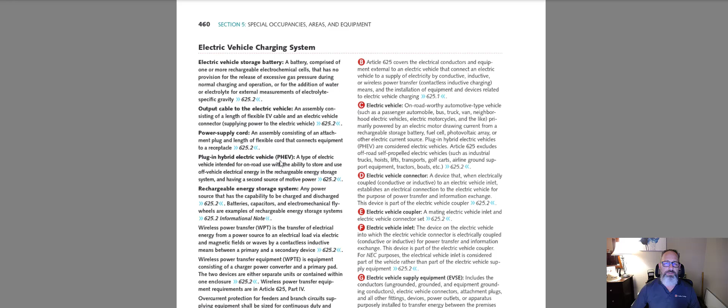The rechargeable energy storage system is any power source that has the capability of being charged or discharged. This could be batteries, capacitors, or electromagnetic flywheels, for example. And the EV charging comes from Article 625 in the National Electrical Code.

Now, when we look at some of the specifications, unless specifically listed or marked for the location, the electric vehicle supply equipment coupling means shall be stored or located at a height not less than 18 inches for indoor locations and 24 inches or above for outdoor locations. So the connections cannot be laying on the ground.

And most electric cars now have the capability of knowing when 240 volts is applied, then this is a level 2 or 3. If it's 120, then it's a level 1, and it changes the rate of the car charging. And not only is the rate changed, but the amperage draw is much lower as well.

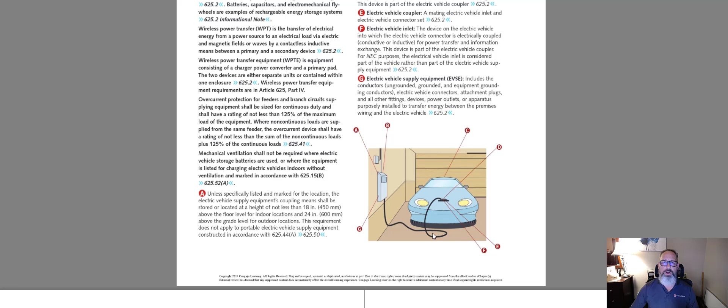So you have to understand when you're connecting and setting up a charger for an electric vehicle, what's the charger type, level 1, level 2, level 3, and then from the manufacturer, what's the amperage draw? They're all different. Tesla is different than BMW. BMW is different than Ford or Chevy. So the manufacturer will provide the amp rating of the outlet or receptacle or the connection point to the charger. So those are things you need to consider.

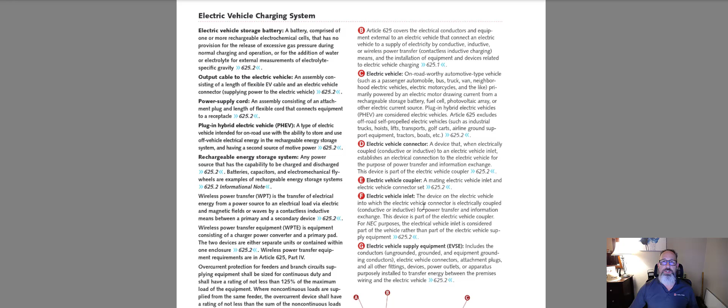There's kind of some average values that can be used, but specifically when connecting an EV charger, you want to make sure that you connect it properly. Now, I wanted to also point out this one right here. So wireless power transfer, WPT. If you guys have a phone and you can lay it onto a charger and it charges wirelessly, that same technology is being introduced and used in mass transit.

For example, they would use electric buses, and at each stop, the bus would come in and pick up a charge so that it will charge very rapidly for a short period of time, and then it moves on to the next stop, and it can be charged without plugging it in. So there's a lot of advantages of that. It could be used down in the harbors where they use more electric vehicles now than gasoline or diesel vehicles. So the wireless charger is new, but it is being stated here in the National Electrical Code.

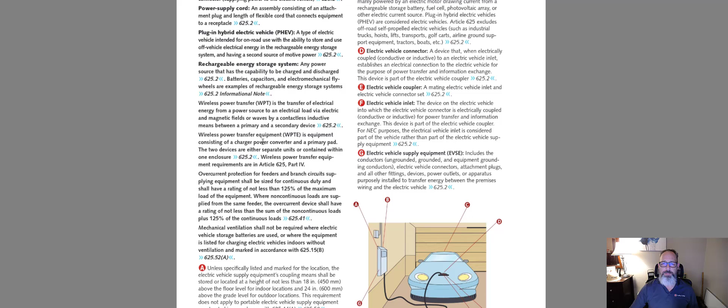So you have the wireless power transfer using magnetic fields or electric fields, and then you have the transfer equipment that's dealt with in 625.2. So the utilities need to be engaged in this, just as an FYI, because this draws a lot of current for a short period of time, and that has to be accounted for in the electric grid.

Fire pumps are the next topic I wanted to cover, because you will run across fire pumps, and you need to understand why they're used and how we need to make sure they're connected. So fire pumps are used to boost the water pressure for fire suppression systems that are installed in buildings. And they may be required because of the large area that needs to be extinguished. In other words, the piping has to be flooded in some cases where it's a dry system.

Dry systems are pipes that have no water in them, and then when a fire alarm is set or a flame sensor detects a flame, it will turn the pump on, and it floods the system and then dumps water in a massive area. The other condition is that the water pressure from the city may not be high enough, and the fire pump's required to boost that water pressure for the facility.

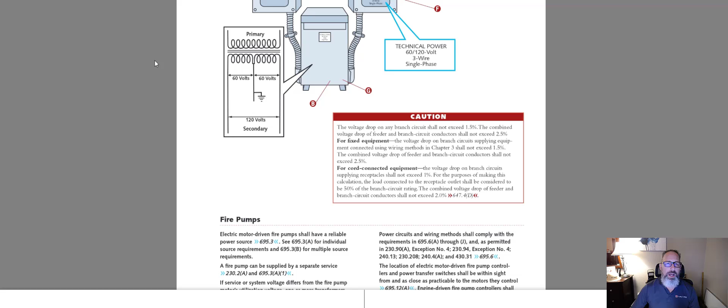So there's a couple things that are really important, and they're a little bit contrary. I was kind of shocked when I first ran across it in the field, because they're contrary to what I had learned before. So when we are connecting a fire pump, and it's going directly to the 480 volt service that is supplied by the utility, we do not install overcurrent protection, a fuse or circuit breaker.

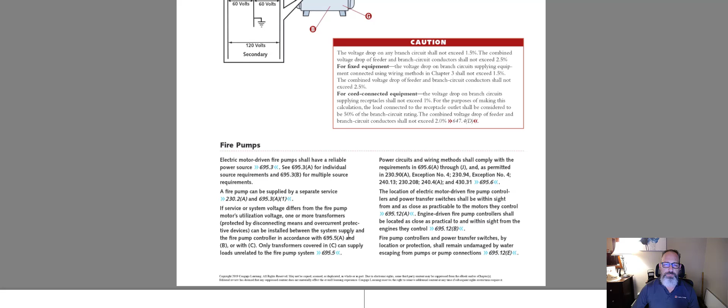And the reason for that is you want the fire to extinguish regardless of an overload. So that motor that's running the fire pump should burn to the ground, figuratively, before you would have a breaker trip. So these will most of the time be line side taps. Line side taps are one of the very few taps that are allowed to be installed ahead of the main breaker for that facility. All right, the next topic is going to be swimming pools, fountains, and similar installations.

There's a lot of pools in California. You may be involved with installing electrical for pools, hot tubs, fountains. And what do we remember about the National Electrical Code? Back at the beginning of the class, Article 90.1, what's the purpose of the code? And that's to protect persons and property. There's no better place than around bodies of water that people need to be protected.

And with the proper installation of the swimming pool, fountains, or hot tubs, whatever other body of water somebody might be in, where electricity is used in that area, it's important that we protect people from electric shock and electrocution. The most important thing to consider when wiring up any electrical device is, can it be reached from the inside of the pool?

That means you're in the pool, you've pushed yourself up, you're leaning over your waist onto the side, and you're reaching out and you're trying to plug something in, your radio, whatever it is, into that outlet, and you're doing that while you're in the pool. And if you can do that, then it's installed in the wrong location.

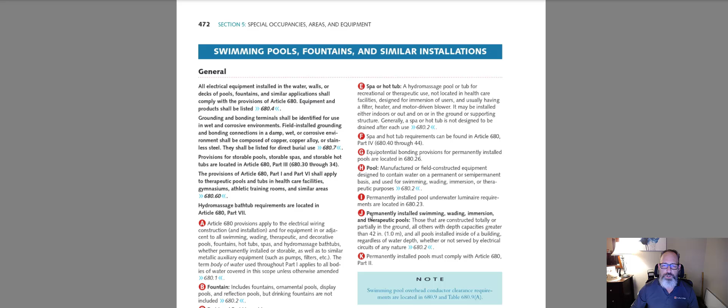The second most important thing is grounding and bonding. And so we want to make sure we don't electrocute somebody by having something too close. And we want to make sure that everything is bonded and grounded. And we're going to talk about what those terms are and how that's done generally. Let's look at definitions so we understand what the code means when it uses these terms.

When we talk about a self-contained spa or hot tub, we're talking about one that you would buy as a package, and it would be installed just by setting it on the ground and connecting electrical connection to it with a flexible seal-tight connection and a GFI protected box on the wall somewhere. Something you would buy at a store. It would be delivered all in one piece, and that would be completely self-contained. It has the motors, the heaters, everything's inside.

We have the hydro massage bathtub. So these are bathtubs that would be installed inside in a bathroom, and they do have a motor for circulating the water, for pressurizing the water. Typically they don't have a heater, but some of them do have heaters, and you can purchase them to heat the water as you are using it.

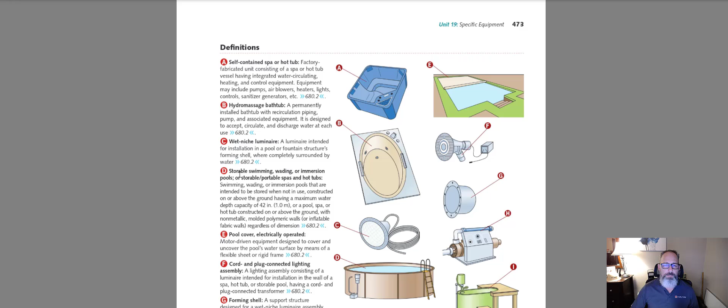There's storable swimming pools, which are above grounds, like I mentioned before. There's also packaged hot tub equipment. This can be all together and it can be ready for install. And we also have the no-niche luminaire, which would be mounted on the surface. I don't think I've ever run across one of these, so there's not too many of them out there, at least in Southern California. Most are wet niche and most are going to LEDs now.

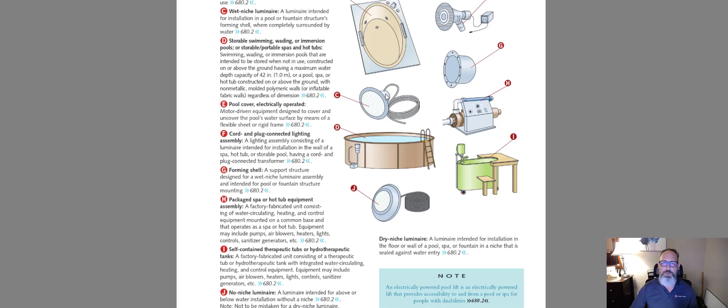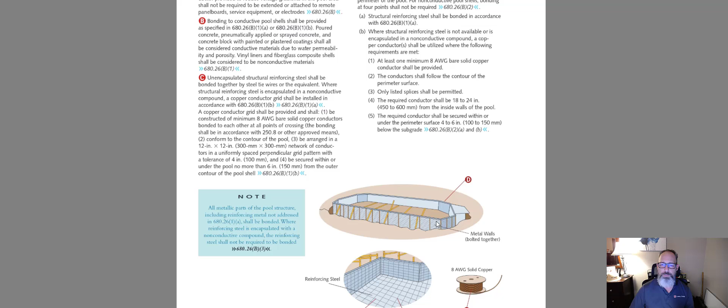So there's a pool construction called form shells right here, and it's steel walls that get bolted together. And then they could be partially buried or completely buried, and then a vinyl liner can be installed, or it could be reinforced and gunited with steel, with concrete and rebar. So there's a couple different options, but this form shell is conductive.

And what you need to keep in mind when you're talking about bonding, the conductive pool shell shall be provided as specified in 680, so our pool section is 680.26. And if it's poured concrete, pneumatically applied or sprayed concrete, so that's like the gunite style.

And concrete block with painted or plastered coatings shall be considered conductive materials due to the water permeability and porosity. Vinyl liners and fiberglass composite shells shall be considered non-conductive. So your truly non-conductive pool would be a vinyl-lined pool with no metal in it, no light, no steps, no ladders, nothing that would have any metal going from the ground or earth around it into the water.

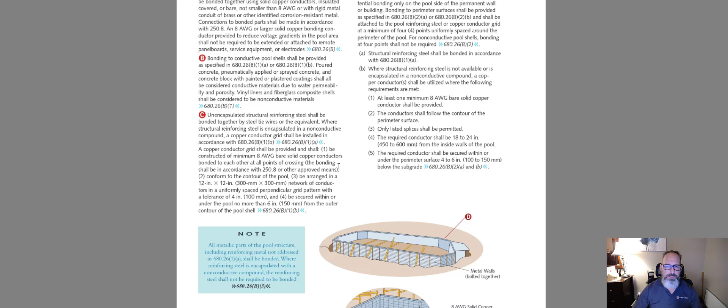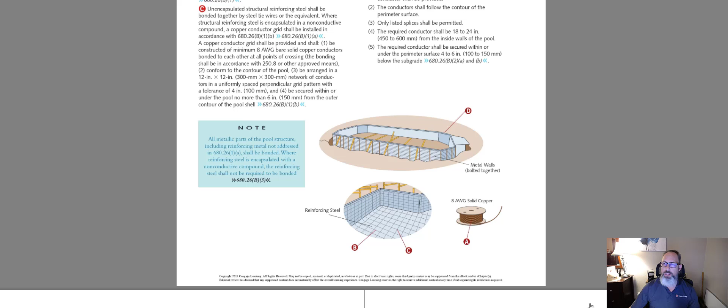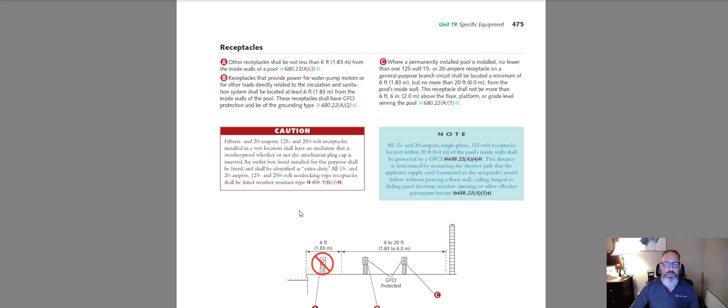And they're non-conductive. Fiberglass is another popular way to go because it's very quick to install, but it's a completely fiberglass unit that's all set into place. You'll find in the code that a number 8 solid copper wire is what's being used to bond everything together in pool construction. Copper needs to be used so it doesn't corrode, and it stays connected and able to conduct.

Now let's talk about the receptacles. So receptacles should not be installed within 6 feet of a pool edge. Here we go again with this idea and understanding that if you're in the pool and you can reach over and plug it in, you're too close. The other thing that's interesting is most extension cords are 6 feet long on appliances. And so if you're within 6 feet, you could get that extension cord, that appliance cord, and it could fall in the water. So just a couple things there to think about.

Remember back with dwelling, receptacles need to be within 6 feet. If you're between 6 and 20 feet of a pool edge, it needs to be GFI protected. Now, that would apply inside, because outside it's got to be GFI protected no matter where you put it, but it cannot be within 6 feet.

So equipotential bonding is going to be what we'll talk about here for a few minutes, and understanding what does equipotential mean. This has been introduced previously around cattle and dairies, where it really was invented for the most part, and the equipotential bonding idea was carried over into pools. Now, I want to caveat that the newer versions of the National Electrical Code, such as 2017 and 2020, specifically 2020, start to remove some of the good principles for bonding a pool essentially because of cost. So to install a pool beyond the National Electrical Code, more bonding is going to be a safer installation.

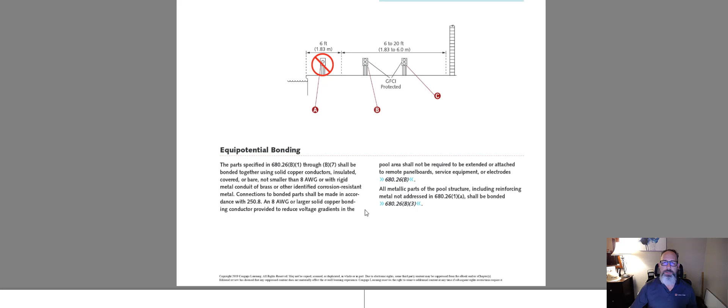I was pleased to hear a friend of mine recently was installing a pool, and they installed it the way that is the best option for the decking, the bonding, and making sure that everything was all tied and connected together. So it made it the safest, not going by the minimum requirements of the National Electrical Code. Equipotential bonding means that we are going to make sure that there's no potential or voltage difference from any points on the pool or around the pool.

We need to make sure that the grid that can be used for part of that equipotential bond is tied together with the copper wiring. So the code is requiring, I believe it's 2020, a minimum of just a number 8 copper wire buried around the pool underneath the slab of concrete. And we see that being used more in the fiber reinforced concrete that's installed. And in parts of California, I have not heard that they're allowing this yet, but I would definitely push back on a pool builder who was just going to bury a copper wire.

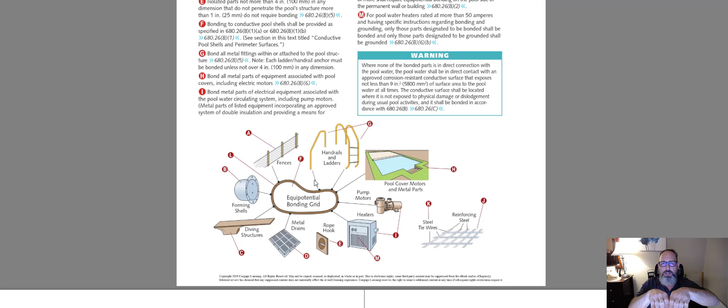But all electric components, all metal components around the pool need to be bonded to create an equipotential bond. Again, the equipotential bond is to have an equal plane, and if you had an equipotential bond between two sides here, if the voltage potential in the earth rises, everything rises and falls together, and you don't have a voltage difference of potential between these two.

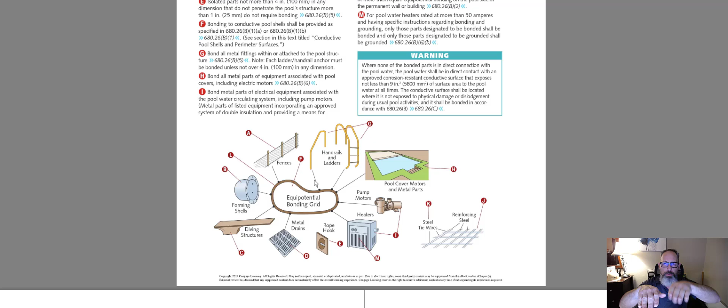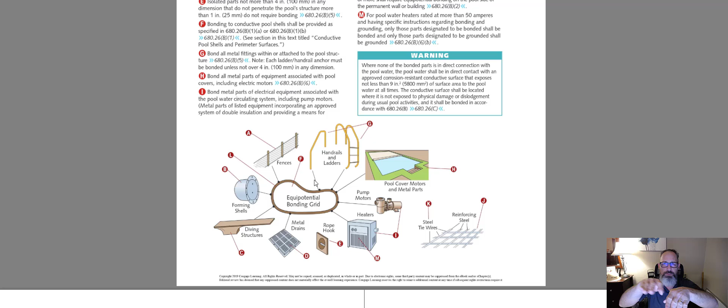But if you didn't bond these, such as the decking around the pool and the pool shell itself, then you could have a potential rise where they're not rising together the same, and you will get a difference of potential between the two, one being higher, one being lower. If this was a potential of 20 volts and this had a potential of 10, then you'll have a 10 volt potential difference between the two sources. So we need to have everything bonded together in an equipotential bond.

If we're going to install luminaries near a pool, this is a good graphic to understand how that works. Within 5 feet of the edge of the pool, up to 5 feet, there are no luminaries permitted in that space. But above 5 feet and within 5 feet of the pool, existing luminaries have to be protected by GFCIs.

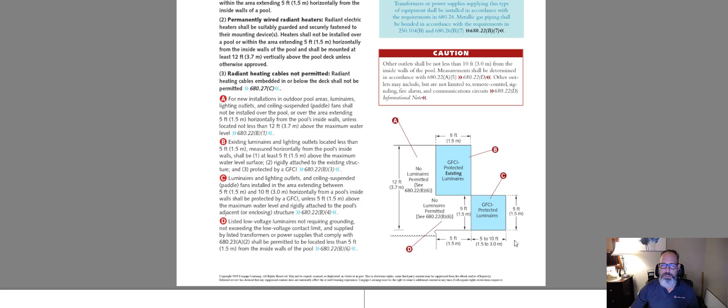Above the pool, up to 12 feet, no luminaries are installed. Kind of like slapping that wire I told you about: if you can jump off a diving board or off the side and reach up and slap it, you could potentially be shocked. Now, if you are between 5 and 10 feet from the edge of the pool and below 5 feet, then you have to GFCI protect that. But if you're above 5 feet and beyond 5 feet from the pool, so up 5 and beyond 5, then it does not need to be GFCI protected.

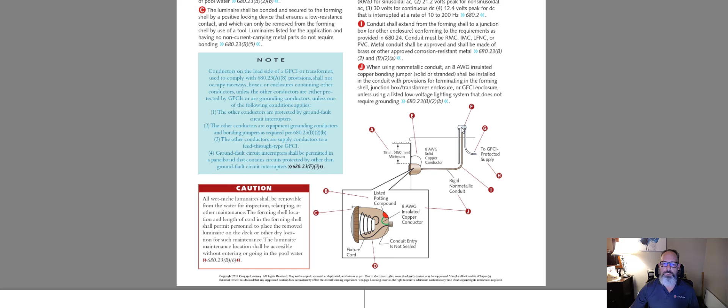Underwater luminaries in the pool. This is the wet niche lighting, and the niche is put inside of the gunite and the rebar when it's mounted, and then all the concrete is shot in. The minimum depth needs to be 18 inches. There needs to be a number 8 copper wire bonding the niche to the pool itself, to the rebar. Almost all of them use a brass conduit, and that brass conduit is going to be filled with water, so you don't want to use rigid conduit because it'll rust. PVC can be installed, but it doesn't provide a good effective ground path. So brass is used, and it needs to go up to a junction box.

The junction box for the underwater lighting needs to be installed a minimum of 8 inches above the pool decking or maximum water line, so it doesn't flood, and you're bringing a ground wire and hot and neutral up into this box from a panel that's GFCI protected. It makes a splice in here with the wet niche luminary, and that luminary factory cord comes all the way up to here. There are no junctions or splices allowed in the niche.

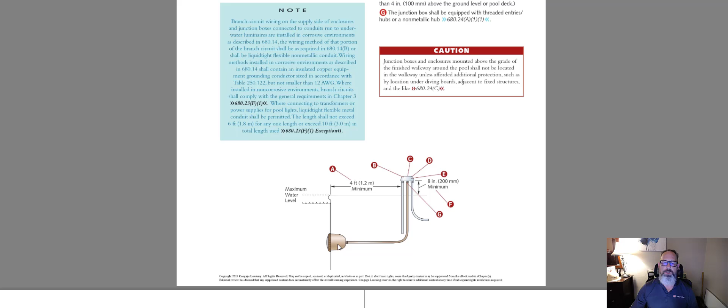I've heard some horror stories of people taking this light out and splicing a new light onto it without changing all of the wire out. Well, now you put the splice in the water, and you have a good exposure to kill somebody with that installation. So these are all factory installed up to here where you're going to splice them in.

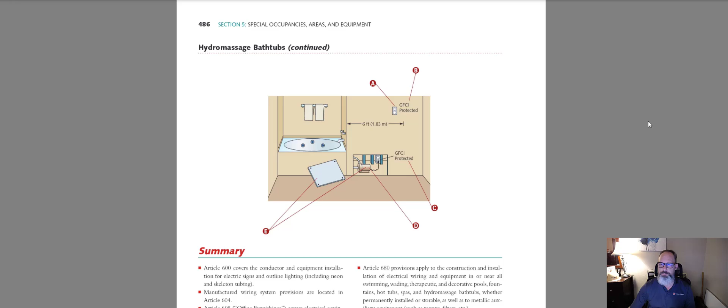So that's a very quick overview of pools, hot tubs, fire pumps, and EV chargers. Make sure that you look at the requirements for the homework on this one and follow that. Also, read through the rest of the sections to be familiar with all of the different code sections being discussed.